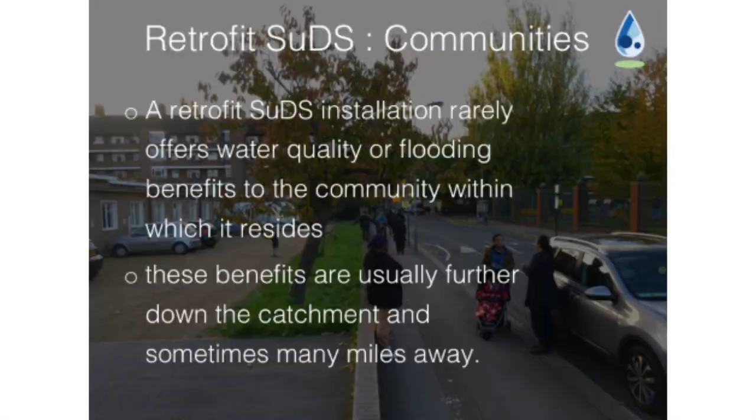So back to the community that we're inheriting with a site that we want to do SuDS on. What we find is quite often where we're going to do a SuDS installation, the local community aren't going to really benefit in terms of water quality and flooding. Often those benefits are somewhere else within the catchment, and it'll often be people they don't know. If it's a river that's being polluted, it might be a river they've never heard of and may never visit.

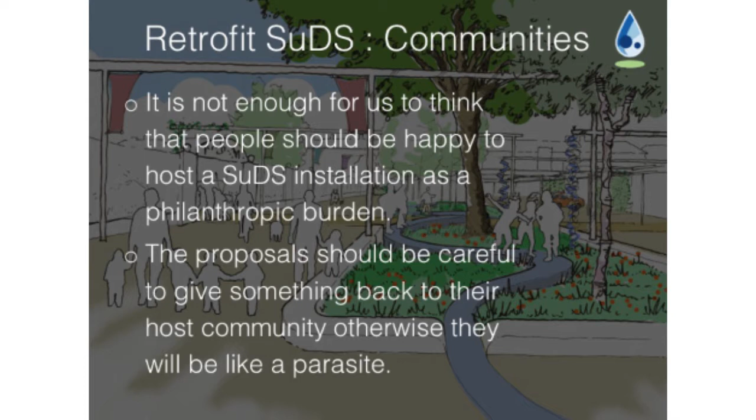So we feel it's very important that where we put in a SuDS intervention, it needs to give something back to that community. So the sketch behind there is, again, a project we're doing with Hammersmith and Fulham, Australia Road, where really the landscape is about giving something constructive back to that community, but it also serves a SuDS function.

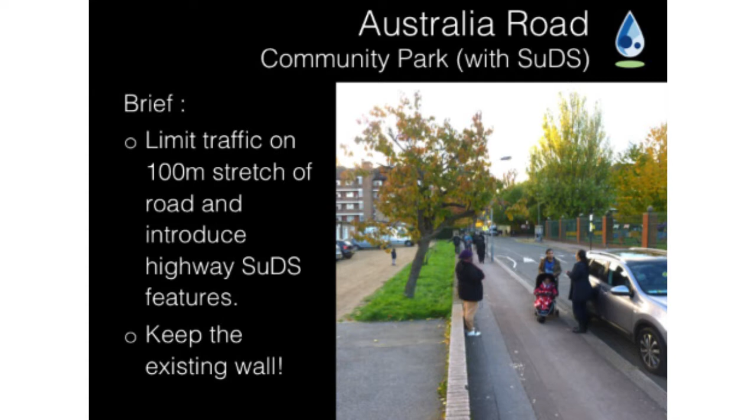Back to Australia Road, the broad brief was to limit traffic on about a 100-metre stretch of road and introduce highway SuDS features. You can see it in this photo - there's a little kid walking along the wall there in the foreground. We were very clear we had to keep that existing wall. Not only is this generation of children walking on that wall every day from school, but a lot of their parents did as well, so there's a very strong feeling in the community that we needed to keep this wall.

There's a school on the left, and there's also 2 playgrounds on the opposite side of the road, which cater for every age range from sort of 0 to sort of 16, 17. There's an adventure playground.

So we worked to redefine that brief slightly, and really put the emphasis a bit more back on the community - the idea that we're creating a linear community park. And with the school on one side of the road and these 2 playgrounds on the other side, it really felt like not just a communal landscape, but one that should be really focused around families and children. So we created this family-orientated, playful hub space.

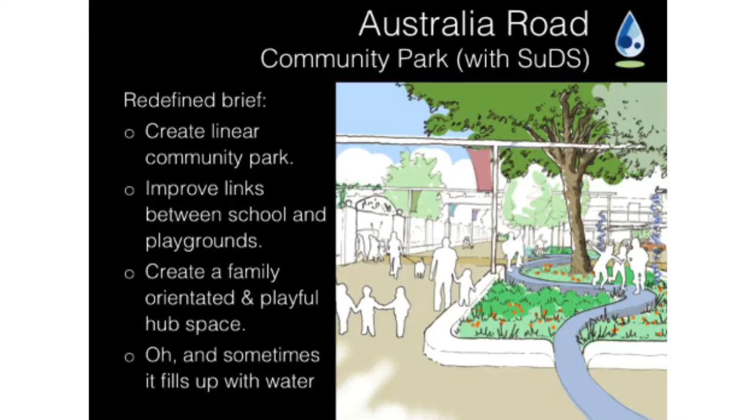When I spoke to the local community about their very straight wall that they'd walked along for 2 generations, they were very clear that they wanted to keep it. But then when I said, well, okay, what if as part of our design we give you a wiggly wall that weaves between trees, with a planted basin below this landscape area that occasionally fills up with water, they all said, well, yeah, fantastic, that'd be brilliant, we'd love that for our kids.

And then when I started talking about the sort of space we're trying to create - limiting the traffic that goes through there to emergency vehicles and service vehicles only, making it a pedestrian priority space - people were like, well, yeah, that's great. That's a safe place where my child can learn to ride a bike, where we can meet as a community, we can have markets, we can have fairs. So really we changed the orientation of the project to be about community.

And then we've got buy-in from that community. We've got community groups that want to help do the planting, want to help maintain the landscape, which, if we'd simply gone in there and imposed something on them, the chances are you wouldn't get that buy-in.

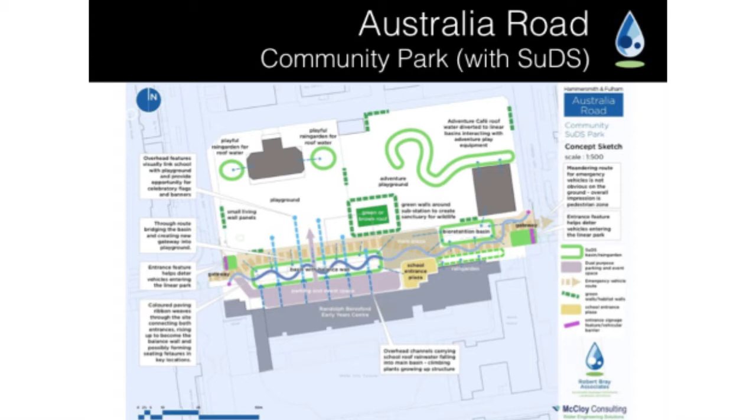So this diagram demonstrates we've realigned the access route through to make any vehicles that do have to go through sort of wiggle through. And we've taken runoff from adjacent roofs, overhead in sort of overhead channels, and dropping down into this main basin in the middle, which has the wiggly balance wall running through it, and various other sort of bioretention basins and rain gardens around the space, all serving that SuDS function.

But really, there's an awful lot of design there, which is about how people use that space as well, and also making the most of that flow of water. So the reason we took the roof water overhead and dropped it down into the basin is because we're going to make it drop down in exciting, interesting ways. Maybe things will move as the water comes down, or the water will spray or come down a chain, or it'll go down a series of buckets.

So when it rains, we want people to go out and look at that landscape and see it come alive, and ideally walk along that balance wall with the added excitement of there being water below - not very deep.

Really, the SuDS - for the local community, they do buy into the importance of the environment and the importance of reducing flooding further downstream. But this is in White City, and their priorities, their day-to-day priorities, are much more immediate and much more personal. And it's the sort of space that we can create for them that is far more important for them and responds to their day-to-day needs.

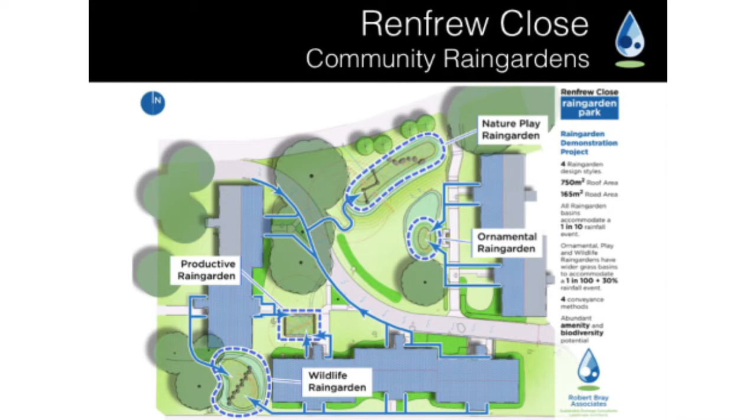So what we did here is we took the rainwater off as many roofs as we could of those 3 blocks, including in some cases roofs on the other side from the main courtyard space, and conveyed them towards 4 demonstration rain gardens.

So we've got 4 rain gardens, each of which demonstrates a different style: ornamental, a sort of natural play area, and a productive garden, which feeds into that kind of climate adaptation idea of a community growing space. We use SuDS to provide relatively clean roof runoff to irrigate that, but also that productive garden space will be able to store water as a basin. And finally, a wildlife rain garden.

But because we've inherited paths in various states of repair and appearance, steps, ramps up to houses, we have to be quite innovative with solutions for moving that water around the landscape, because this needed to be an affordable project. So we couldn't move things around too much and change levels too much.

So we had quite a lot of fun taking water down channels, always trying to keep it on the surface wherever we can. Where we do need to go underneath the path, we keep the level of that channel very low, so we've got minimal construction, and we're popping straight back out into the landscape on the other side of the path.

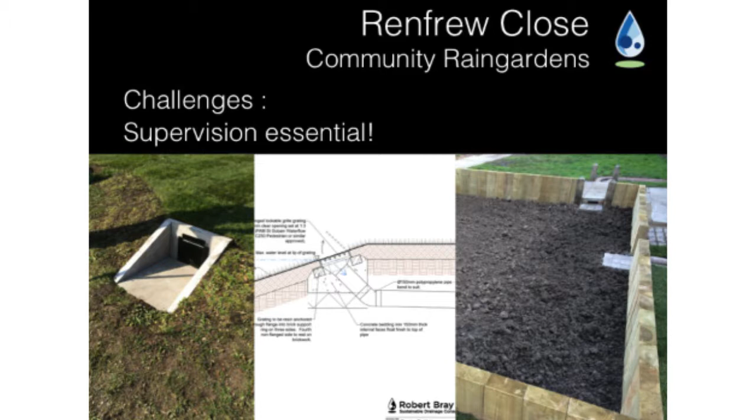On the right is a great demonstration of what this was meant to be, a sunken garden - this is the productive rain garden, it was meant to be a sunken garden with storage. How it was built was a raised wall with no storage. You can see the inlets coming under the little pavement bridge, and there's no storage in there whatsoever. The soil is exactly at the same level as where the water comes in.

In fact, in some cases, it was above the outlet level. Bit of a disaster. So there's a saying that gets bandied around: you don't get what you expect, you get what you inspect. That kind of supervision and inspection from the SuDS designer is really, really essential, more so than normal landscape projects.

So what we're trying to do, and some of these will be monitored for their performance, we're trying to demonstrate not just the different styles of rain gardens and how they can be integrated into a community landscape, but also how they perform at different return periods. It's a landscape that gives something back to the community, to all members of the community, from children to the adults doing the productive garden and just enjoying the wildlife coming into their neighbourhood.

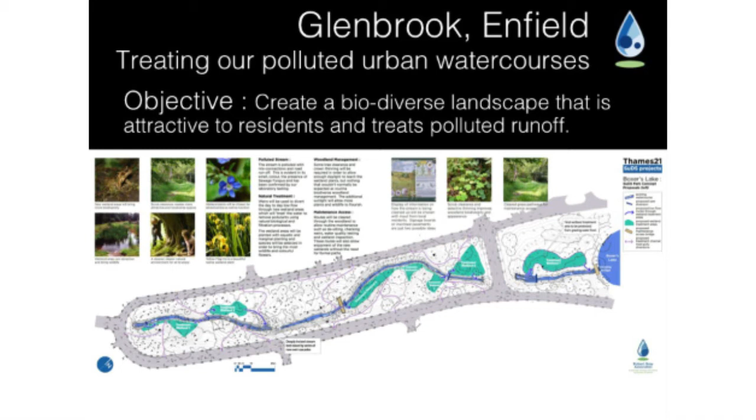So these lighter green splodges each side of the stream are where we were able to divert water out, take it through a treatment wetland, and then bring it back into the stream again. So this will all be very heavily monitored. So hopefully by the end of it, there will be some noticeable change in water quality, and hopefully this will inform future projects.

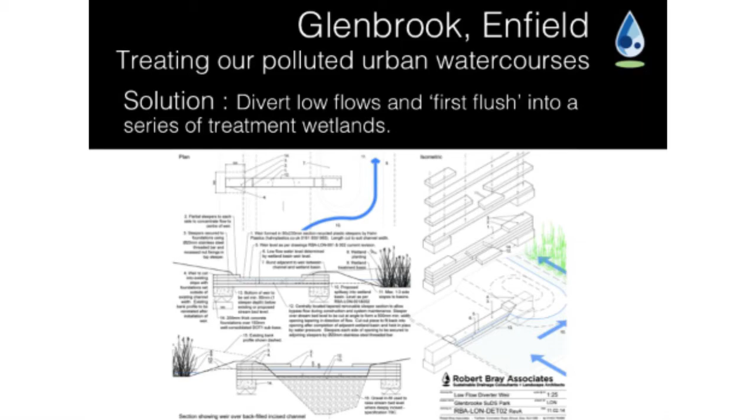So you can see how we've got the weir down the left-hand side in the main channel, but it diverts water into that wetland and comes out over this weir back into the channel again. But then when the flow increases, so we're trying to focus on the low flows, the day-to-day flows that carry the most pollutants. When a storm comes and those pollutants are being diluted and the rate of flow is much higher, it will carry on straight down the existing channel as it would normally.

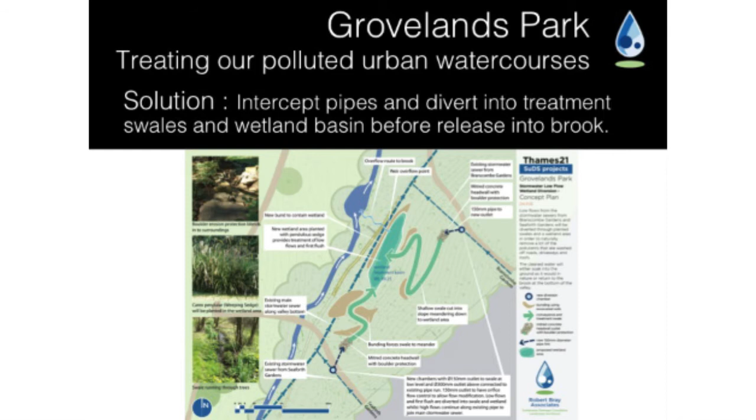Another project with Enfield and Thames 21 is Grovelands Park, where there are two surface water pipes which feed down into a culverted watercourse. Now, Enfield are working to deculvert that watercourse, and what we've done within Grovelands Park is to intercept those two surface water pipes and take them through the quite steeply sloped woodland in swales winding through the trees to a basin at the bottom of the valley, which will provide treatment.

And this is a good example of basically, for all our detailed survey, for the many hours that I spent poring over that survey, plotting out a route for this swale, when it actually came to walking around with the ARB officer and finding that a number of trees weren't recorded on the survey, we basically had to plot the route pretty much on the ground with a spray marker, and agree which trees. We had to take a few trees out, but we tried to minimise that.

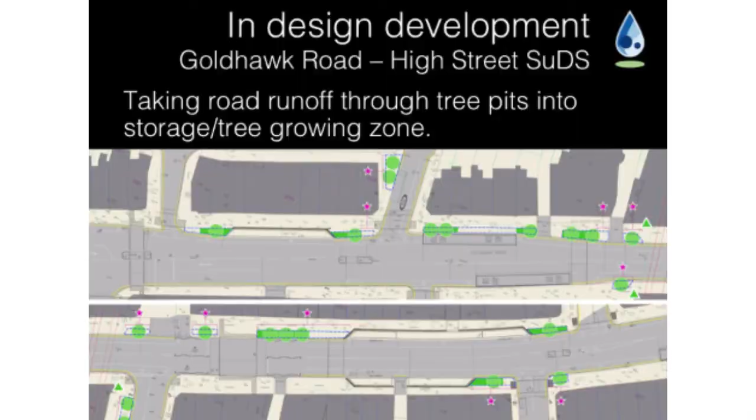Okay. A couple of projects that are in design development at the moment. This one I mentioned, Goldhawk Road, very typical London High Street. So, going to be a great example of how we might roll SuDS out in this sort of very dense urban environment. So we've identified opportunities at the roadside where we can try and get a tree pit bioretention sort of device. The services have kind of quashed a lot of those. But here's basically the principle.

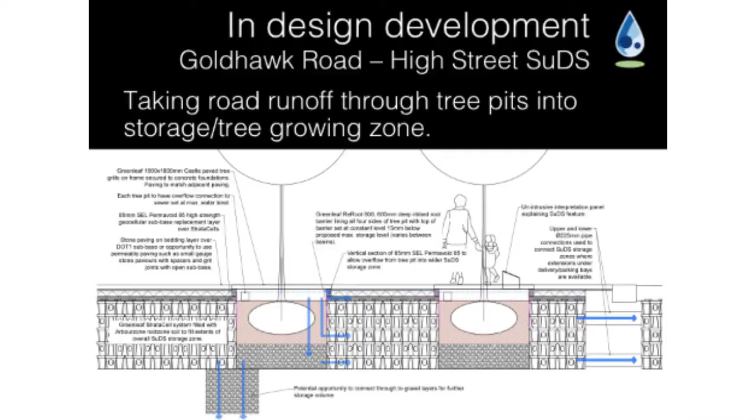We're taking the runoff at the surface straight into tree pits, so not via gullies, straight through the curb level into a tree pit, and that provides our source control for that water. So most of the silt loading and pollutants will be taken out at that point. And most day-to-day rainfalls will never make it out of that tree pit. So most rainfall events are helping to irrigate those trees.

And then in the larger rainfall events, those tree pits will spill over, and the water will then spread into this cellular structure, which also provides the appropriate soil volume that a good urban street tree needs to grow in. You can't actually expect a tree to grow in a 1 meter or a 2 meter wide tree pit. Each tree needs about 20 meters cubed of growing medium, which is quite hard to achieve in these tight urban environments. So where we are going to put something like that in to get a good street tree, with this sort of system, we can also use that as SuDS storage volume as well. So that's what we've got here, which we're hoping to roll out on Goldhawk Road.

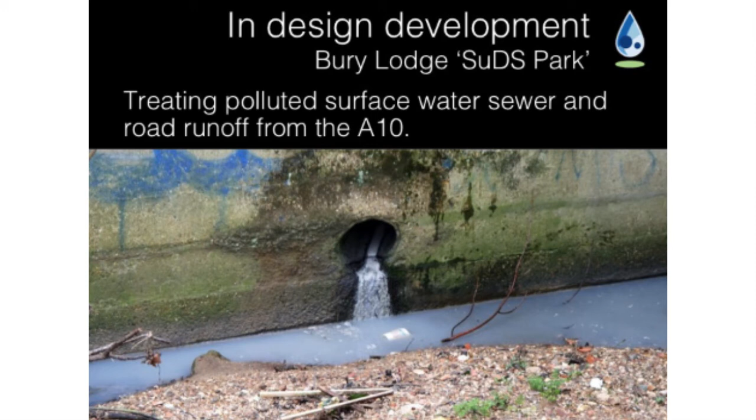Another Thames 21 project, next to the A10, you wouldn't know it, but that's a surface water pipe. That is just meant to be surface water carrying the usual road pollutants. But as is very typical of our surface water pipes discharging into rivers and streams, it's got a lot of misconnections. Sometimes whole houses with 5 bathrooms and their kitchen and their washing machines, all discharging into what should be a surface water sewer, and with the resulting pollution that you can see here.

And the whole idea of this space is that it's a park. It's a place that people can use. We're going to link it to the existing Bury Lodge Park as a more wildlife extension of the very formal park. And we want people to see that when the water comes in, it's actually quite smelly. It's got things in that you wouldn't like to see, and we want people to understand that this is their water. They're doing this to the water, and then we want them to see how it improves in quality as it moves through the system.

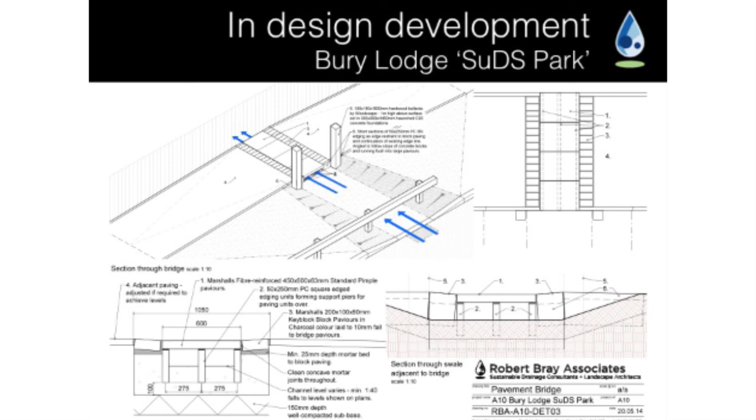But it really does require quite new thinking to dealing with surface water flows. So, how do we take water off roads? This is a classic solution of ours, which is to fill in the gully, drop the curb, take it through a swale, but where we meet a path, we then need this bridge detail. On retrofit SuDS, you have to do a lot more of these sorts of solutions, we find. Trying to find ways around existing features. But that's what makes our work so interesting, really. I think that about sums it up, really.